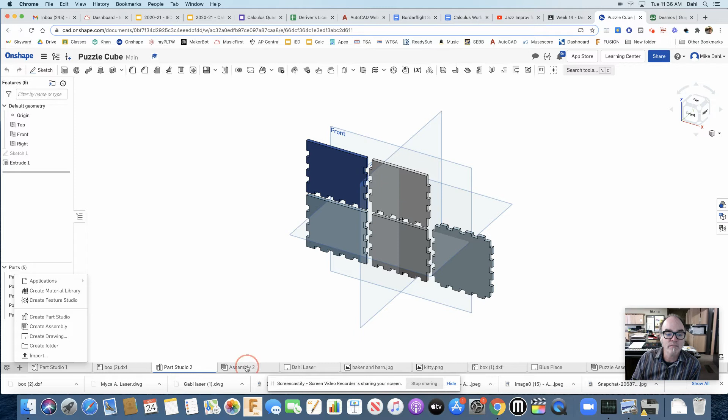It is taking these 5 pieces for your box and making an assembly out of them in Onshape. So what you do is you go down to the plus here and say create assembly. You already have one assembly, but you're going to make another one. I already have this one open here, so it'll be blank. You'll come up here to insert, and you should have 2 part studios now. You're not going to make an assembly of your puzzle cube, you're going to make an assembly of these pieces.

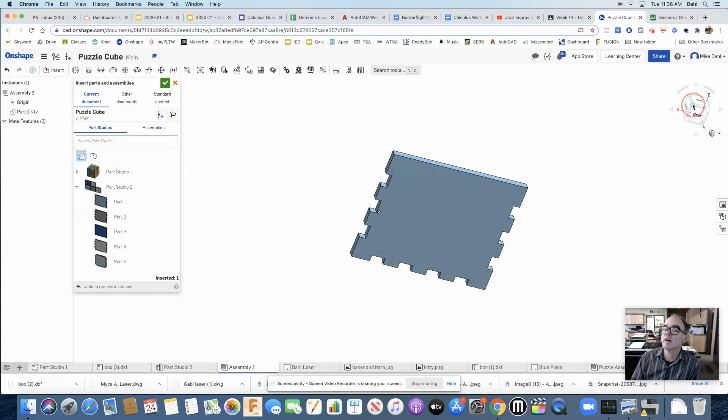Click on this little arrow, and we're going to do one piece at a time. Let's start with part 1 here, and I'll place that. Oh, I'm not in my ISO view. Let's see, top, front, right. There it is. So I place that, and remember, whenever you place the first piece, usually, or at least only one piece, you fix it. So I right-click and I fix. That means it doesn't move anymore.

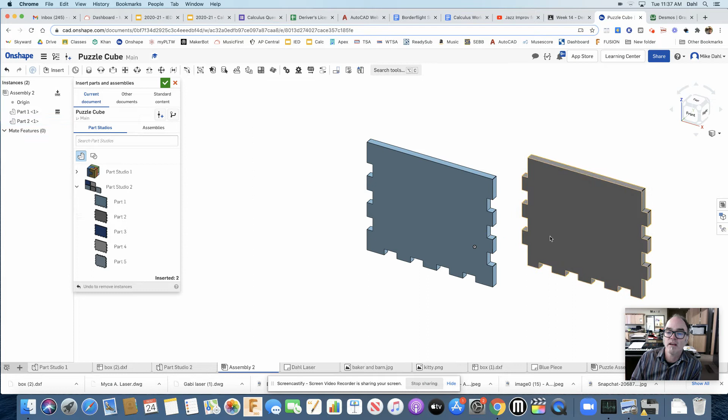So now let's grab part 2, and now I'm going to try to figure out how to assemble that to this one. I'm just going to grab that one. I'll say, okay, I got enough pieces for now. And here's where it gets tricky.

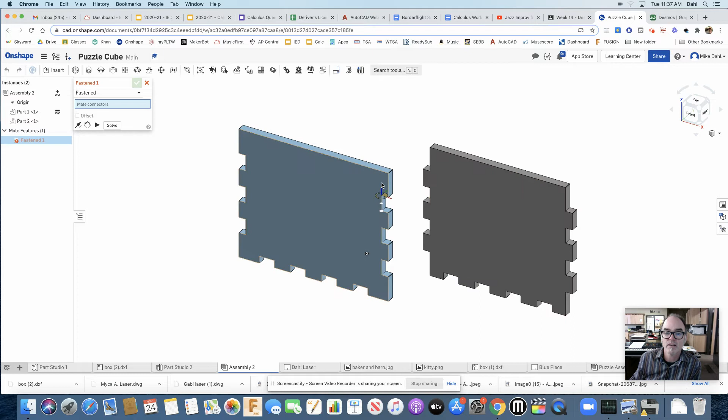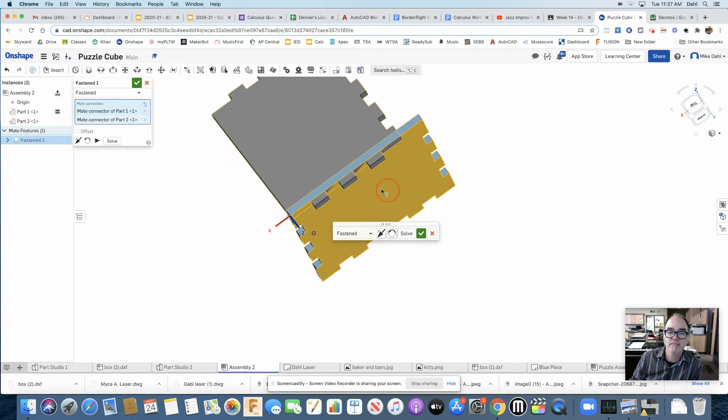Grab your fastened mate, and I'm going to put this one, kind of rotate it and put it like right here. So these kind of teeth go in these teeth over here. So how do I do that? Well, I'm going to say grab this spot here, and now I have to visualize, okay, what's going to touch that? And I think it's this corner right here. So then I zoom out, and first it looks like, no, that's not it, but don't give up hope yet.

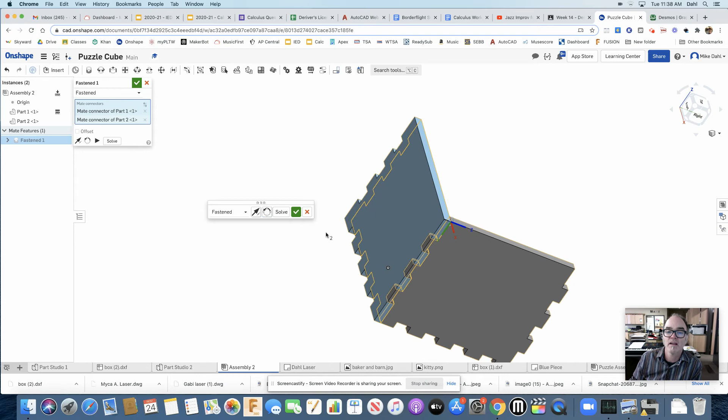So let's just do a little rotate. Was that it? No, that's not it. Rotate again, that's not it. Now I'm back, yeah, none of those rotates work. So let's flip it, and now let's rotate, see if it makes it in there. Hey, look at that, okay. So at first it didn't look like that was right, but if you give it enough flips and rotations, that's it. Sweet. All right, so that's what you do.

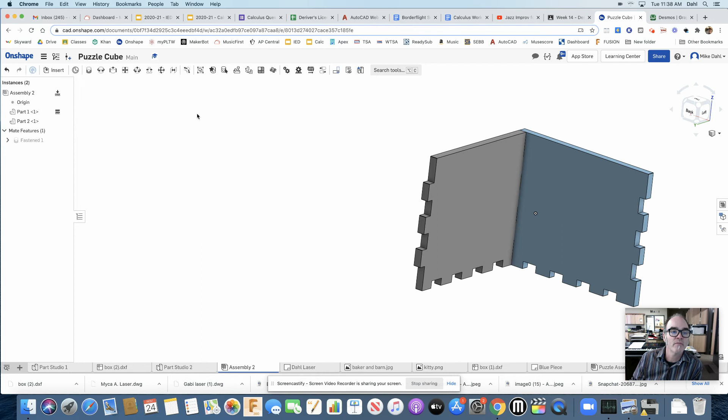Then you try to grab a second piece. This just means it wants to do another fasten, I don't want to. So we'll insert from part studio 2, part 3. This one's going to be a little easier because it's already kind of oriented in the right direction. You don't have to flip it. So you're going to kind of perform the same thing here.

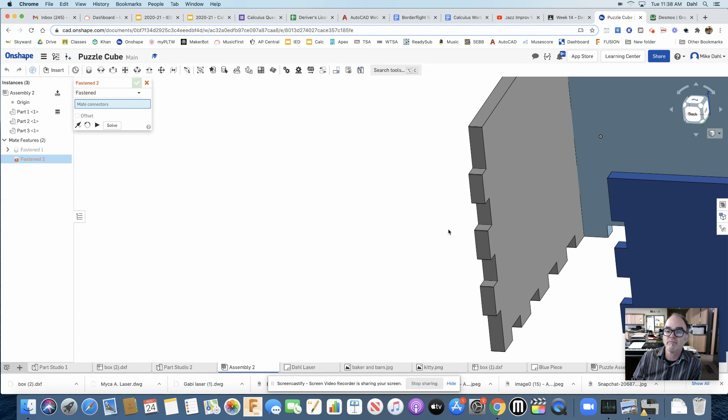You're going to say, oh, see if I can do it. Let's see, I want maybe that corner there to align with that guy. And hey, look at that. No flipping or rotating needed. All right, good luck with that. It's kind of fun.